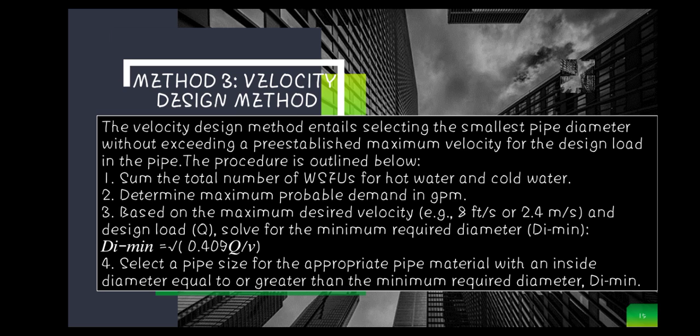So we have a sample problem here. A large 10-story office building has a demand load of 60 WSFU for cold water and 25 WSFU for hot water at each floor. An additional supply of 18 gallons per minute of cold water is required in the basement for make-up water, for mechanical equipment, and landscaping sprinkler system. The system will be plumbed by type L copper tube. Use the velocity design method to determine the minimum required size of hot and cold water supply pipes serving the building based on a maximum velocity of 8 feet per second.

So first, we have to get the total cold water demand load. So we have to multiply the 60 WSFU by 10 floors, and we will get 600 WSFU.

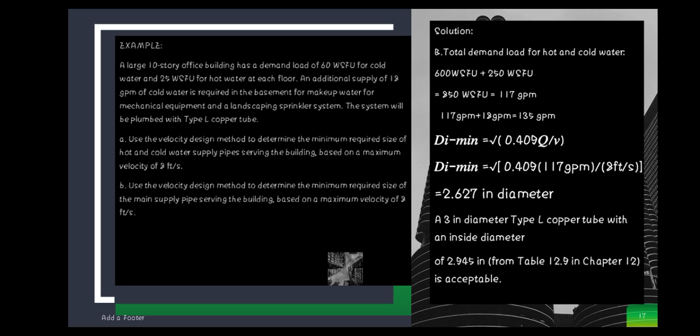And then, gagamitin ulit natin yung formula para sa minimum, the square root of 0.409 times Q over V. And then, substitute lang natin yung mga values. Tapos, makukuha natin ay 2.627. And then, based ulit dun sa table 12.9 in chapter 12, a 3-inch diameter type L copper tube with an inside diameter of 2.945 inch is acceptable.

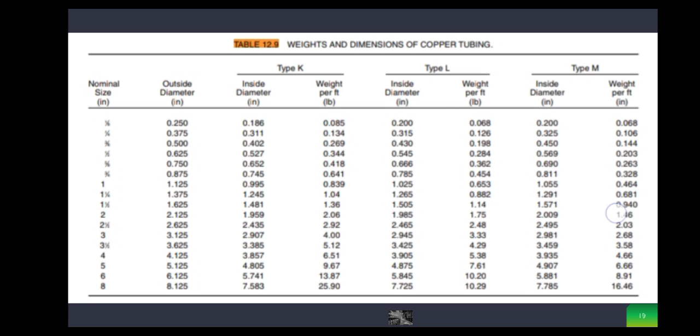The fourth method is the equal friction design method. A more accurate approach to sizing the pipe diameter in a complex network of pipes is the equal friction design method. To do this method, first, we have to find the volumetric flow rates along the side of the chart. Then, move horizontally across the chart to the pipe diameters and for specific nominal diameters, note associated pressure drops and velocities. Then, select a pipe diameter having the desired pressure drop including fittings without exceeding the velocity limitation requirements.

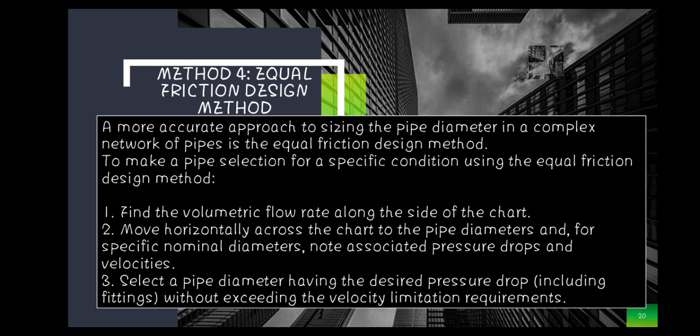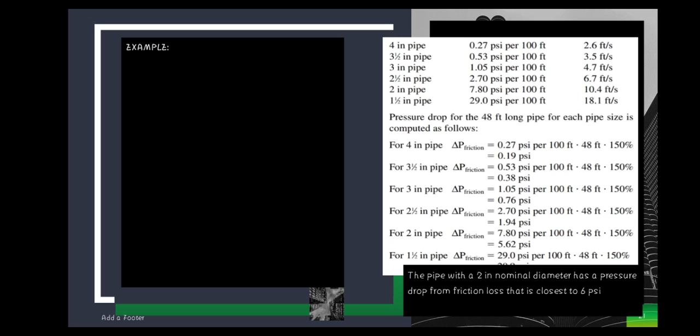So, let's have an example. Select a nominal pipe diameter of copper pipe type L with a volumetric flow rate of 100 GPM. The desired pressure drop from friction loss is 6 psi in 48 feet. Use a 50% increase in pressure drop from fitting losses.